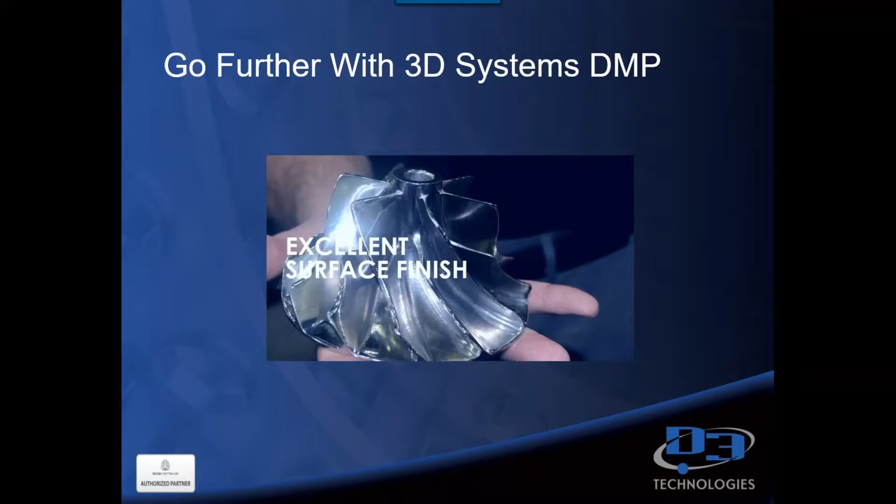So I know that gave you just a little snippet of what some of the laser metal printers look like and some of the process that it uses, and I'm going to get into a little more detail with that further in this presentation. But as you guys all know, we operate in what I call a hyper-competitive world today.

Innovation is really the true hallmark of a successful organization. Additive manufacturing has been around for 30 years, as you guys know. 3D Systems was the first to invent 3D printing with Chuck Hull, our founder, and it's obviously revolutionized to where we have today.

So as we know, it really does hold the promise of fundamentally changing the nature of our manufacturing. But only recently has printing metal parts become compelling enough, with a strong enough value proposition, for most companies to really take notice and start to take advantage of this technology.

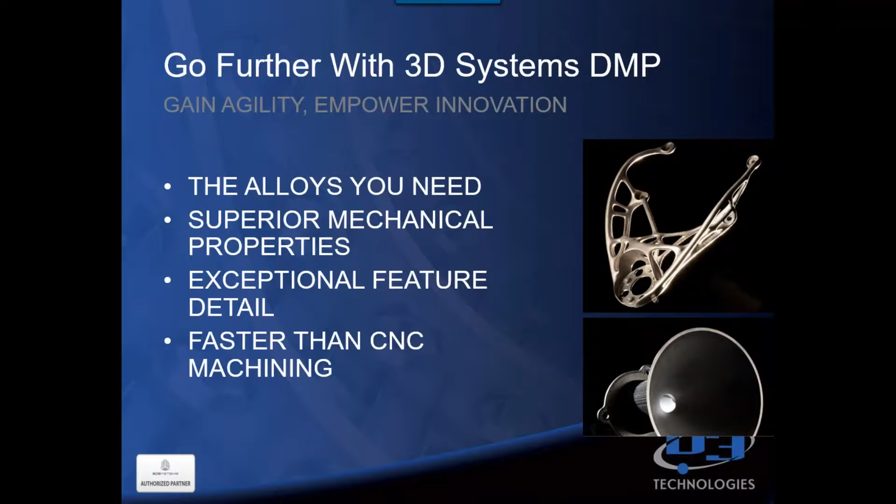So now, with 3D Systems, we can make parts from alloys that you need that have superior mechanical properties, the fine feature detail that you need, and in all honesty, not in high volumes, because CNC manufacturing is still faster for high volumes. But for low volumes, and for those ergonomically interesting products you need printed, you can do it through metal printing today faster than you can with CNC machining.

3D Systems' metal printing process builds up, as we saw in that video, a fully dense, chemically pure, complex metal part from your 3D CAD data by simply melting fine powder with a laser beam. As you saw, it's a very high-powered laser beam, applied layer by layer - it sweeps the powder over, does the laser beam, sweeps the powder over again. This really does provide you with that industrial part quality, precision, and repeatability.

Today, those printers allow you to print alloys that range from aluminum to stainless steels to titanium and other performance materials. I'm going to show you some of the different material choices later on in this presentation.

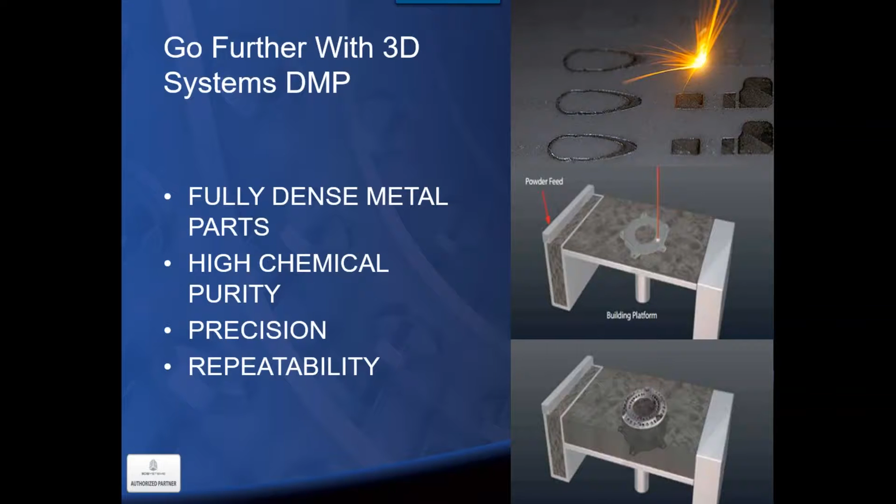With the ability to produce metal parts with the challenging geometries that I talked about, if you take a look at these pictures, you're going to see that those really just cannot be made through your traditional subtractive or even your casting technologies.

So DMP, or direct metal printing, is really ideal for aerospace, automotive, and healthcare applications, among some others out there. It allows for the production of small and extremely complex shapes so that you don't have to worry about tooling, and it really permits dramatically different part designs than your conventional processes like machining, stamping, or even die casting would allow.

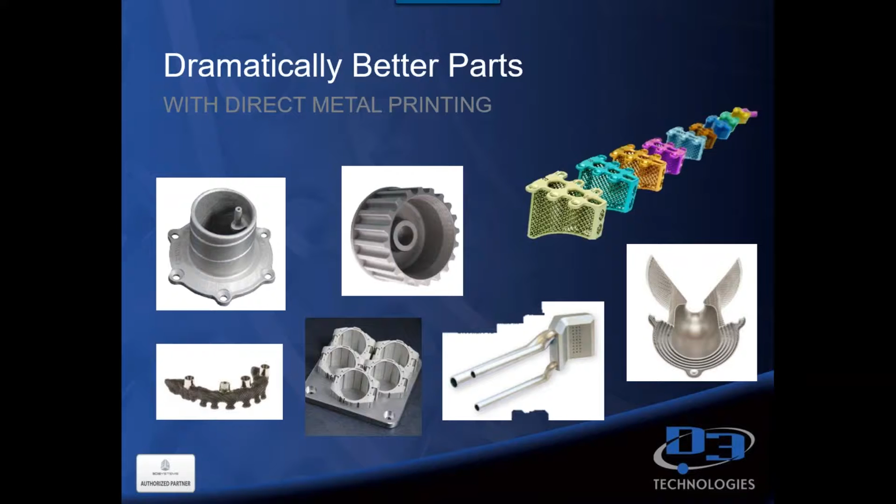As I said, we all like to say that additive manufacturing complexity is free. There's really very little cost or time associated with making parts of very high geometric complexity, which is one of the reasons 3D printing is being adopted for fabrication of all sorts of performance parts. I just want to give you an example of how companies are using 3D Systems direct metal printing today.

Number one, conformal cooling channels can be printed within objects like turbine blades and other components exposed to extreme temperatures. Those channels are not manufacturable any other way. You can't do that through traditional CNC, and it empowers new designs so they're lighter and perform better, believe it or not.

Speaking of lighter weight, DMP, or direct metal printing, is really great for shaving weight from parts. Lattice structures, topology, and thinner walls are easy to do with direct metal printing. Think about how additive manufacturing is perfectly aligned with weight reduction. Every gram of material you don't use really does save you time and money.

The opposite is true when you think about it for subtractive machining—we're talking about taking weight out, which really increases your time and cost. From a product reliability standpoint, it certainly goes up, as things previously assembled from dozens of components can now be printed in just one single piece, which saves a lot of time, reduces bill of materials, and reduces expenses.

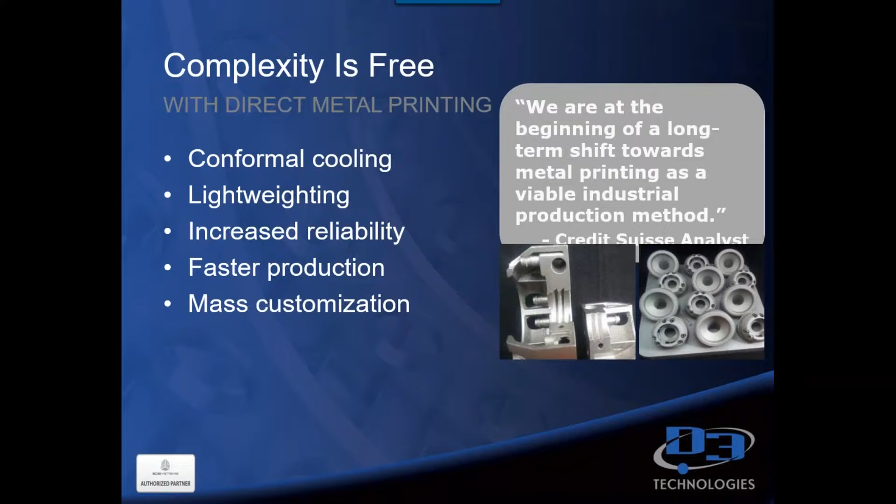So I wanted to put together a list of where these parts and uses are being made with direct metal printing today. Think about this as far as your organization goes and see if any of these might apply to you.

Many companies really are buying 3D printers for specific uses, and then over time they find that additive manufacturing is really useful in more ways than they actually anticipated once they have it in-house. So as I said, there are many different ways it's being used today.

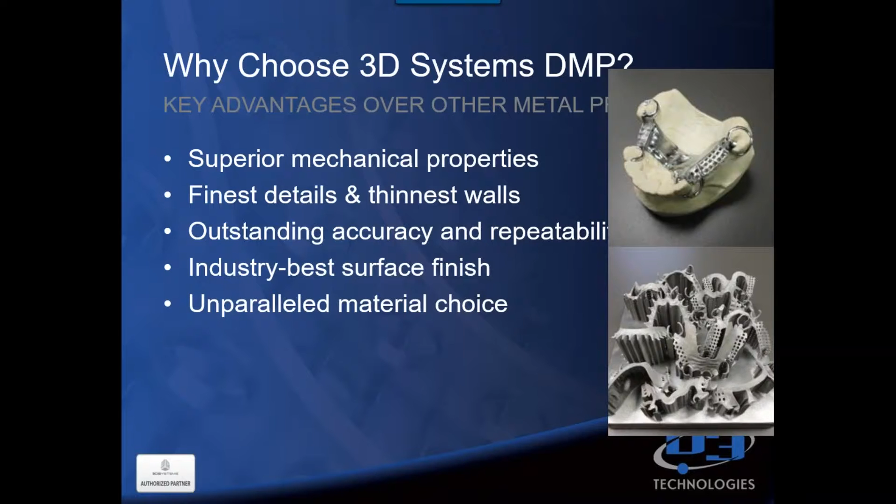There are other approaches certainly to additive manufacturing. So here are, I'd say, some good advantages for 3D Systems.

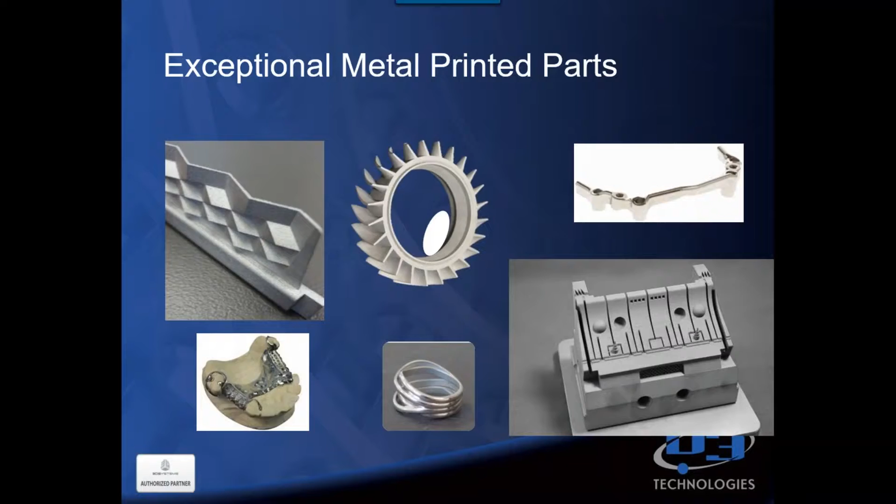3D Systems offers about 4 different machines out there, and I'm going to talk a little bit about these so you have an understanding of the differences—they all have different capabilities. The DMP 100, 200, and 300 are automated systems. They offer a hands-down great surface finish, and they come in 3 different size systems, with build plates differing depending on what size you need for your research and development.

And of course we've also got the 320 unit, which is our latest and greatest, built on an architecture focused on throughput and production flexibility. With almost 500,000 parts built, 3D Systems has refined and optimized the printer to run the most challenging alloys in a 24/7 production environment.

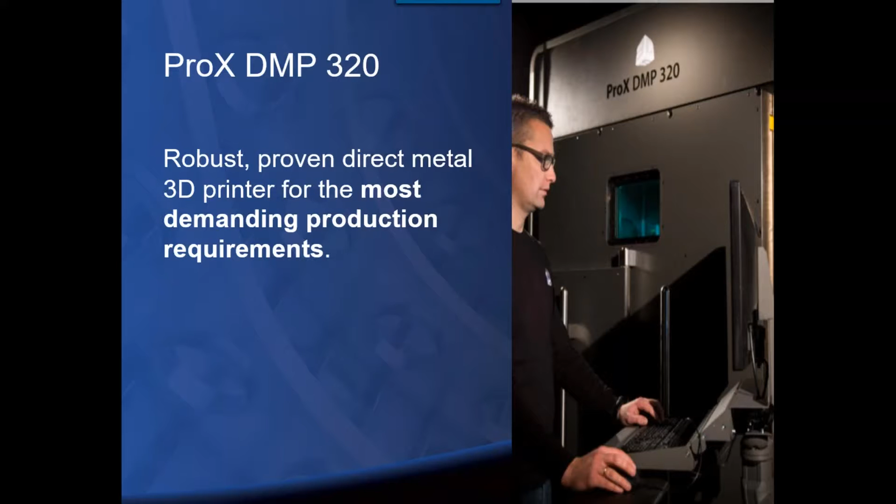So let me show you a little bit about the ProX 320, this heavy-duty metal printer, and what you can get from it. Obviously, with the 320, you can ramp up your additive manufacturing and print parts with some of the highest performance alloys, such as titanium, stainless steel, or Inconel 718.

So with the 320, as I mentioned, it's been proven with over hundreds of thousands of prints. This is designed to run 24/7. It has the largest build volume, with a 275 by 275 by 420 mm build volume, so this is really a large build volume.

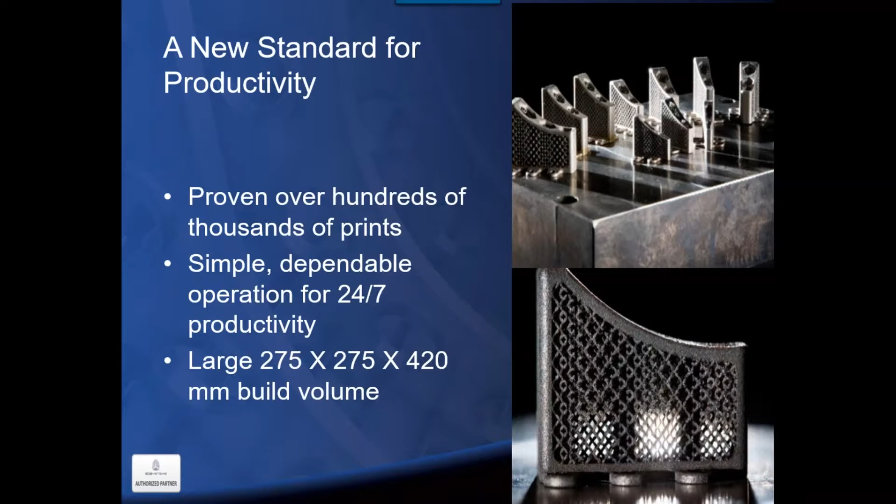This is a good example of a quick swap build module. It enables super fast turnaround between material changeovers and fast powder recycling. As soon as one build is complete, you can remove the entire build module, roll in a new one, and start your next build. While you're depowdering parts outside the printer, as you saw in that video, it's easy to remove, as you can see in the lower left image. The included rolling stand lets you move build modules around your shop floor easily, meaning virtually no downtime between prints, so you can keep pace with demanding production cycles.

In addition, the sealed chamber during builds helps keep oxygen contamination to a minimum, and that's very important when building metal parts.

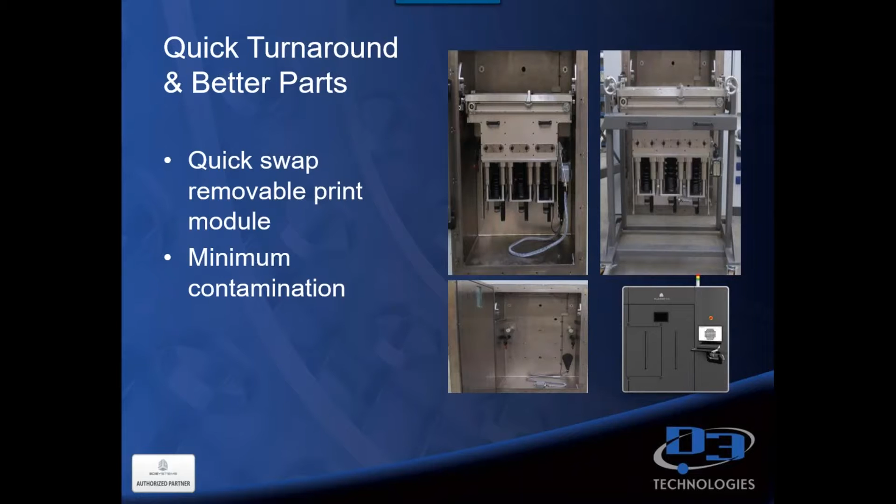Every part that comes off the DMP, the Direct Metal Print 320, is exceptionally chemically pure because of the build chamber's low oxygen content of only 25 parts per million. That is really incredible. Such a low oxygen environment enables the 320 to build oxygen-reactive alloys that are really challenging to run in other printers, meaning these parts are strong and corrosion resistant as a result.

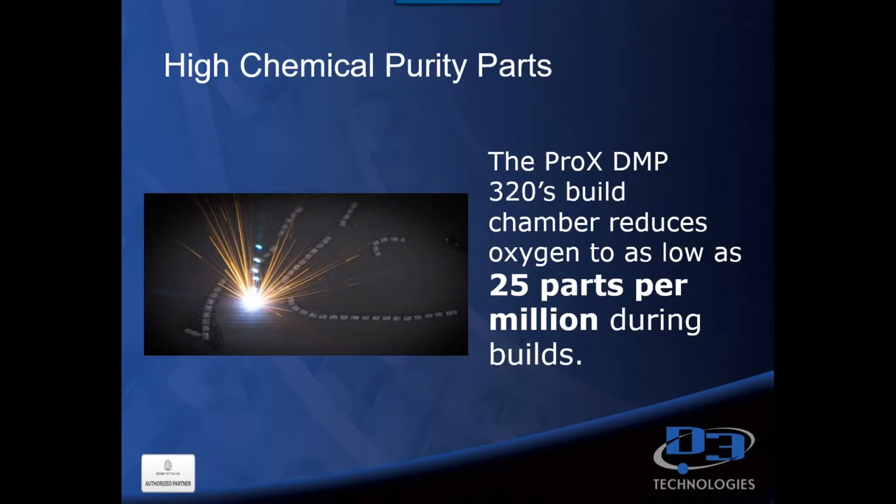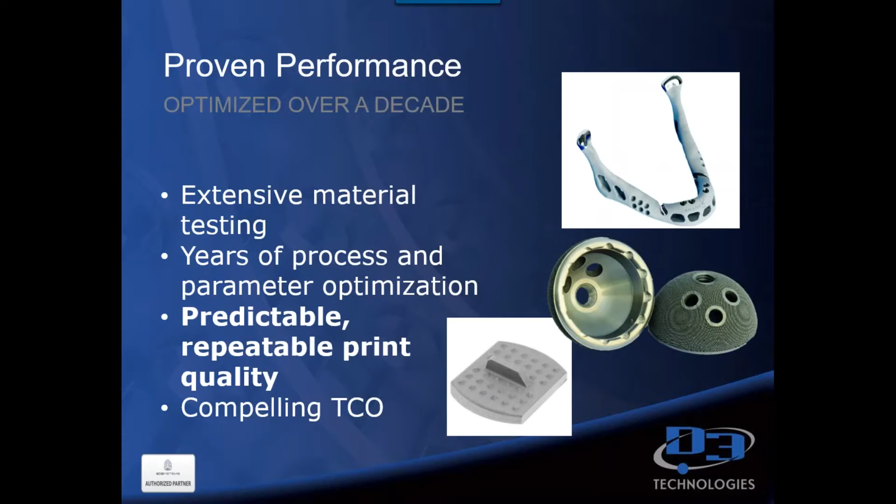The 320 features build parameters developed from an outcome of nearly 500,000 builds, giving you predictability and repeatability for virtually any type of geometry. As I said before, complexity is really free. We just came out with this printer at the beginning of 2016, yet it's still got that decade of heavy use and optimization through running it in a Service Bureau environment.

So these are the materials. The 320 is available in two configurations: one optimized for titanium, and one optimized for stainless steel and Inconel. These configurations can be changed at any point with a 3D Systems service technician through a simple service visit. So those are the three materials, also the most challenging materials, that can be run in the 320.

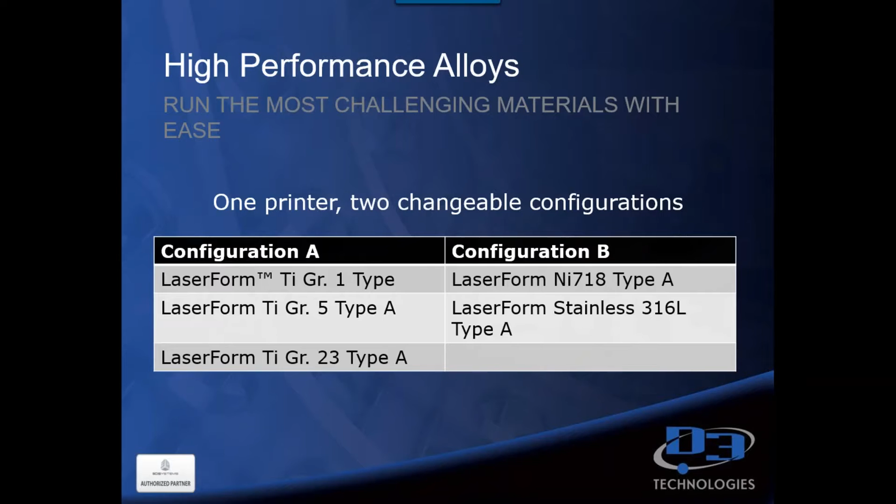The 320 is heavy duty. It's a great standard for productivity in metal printing, designed for high precision, and produces chemically pure titanium, stainless steel, and Inconel parts.

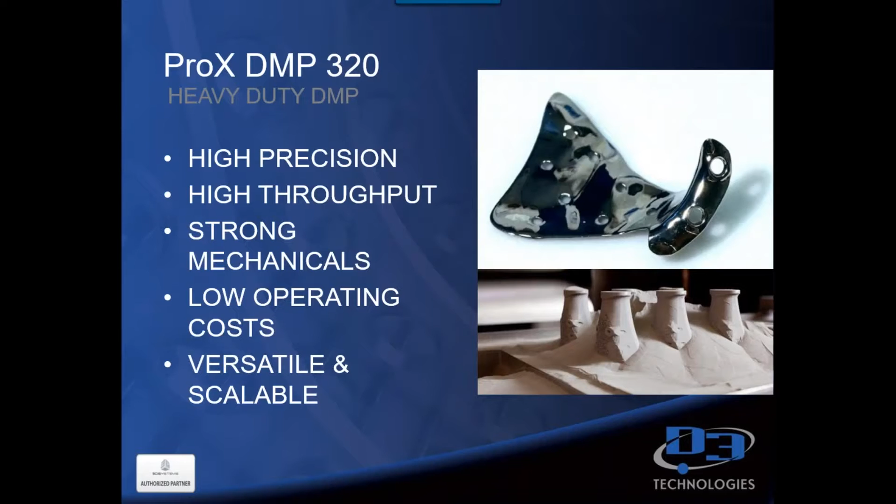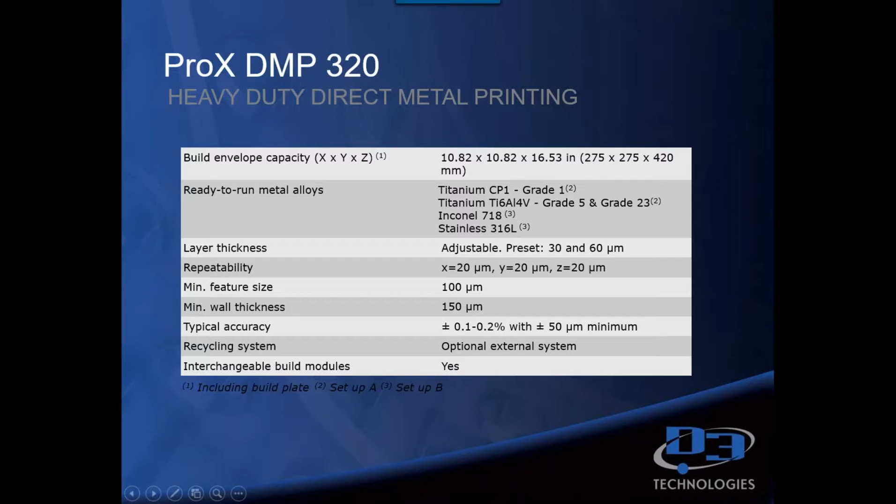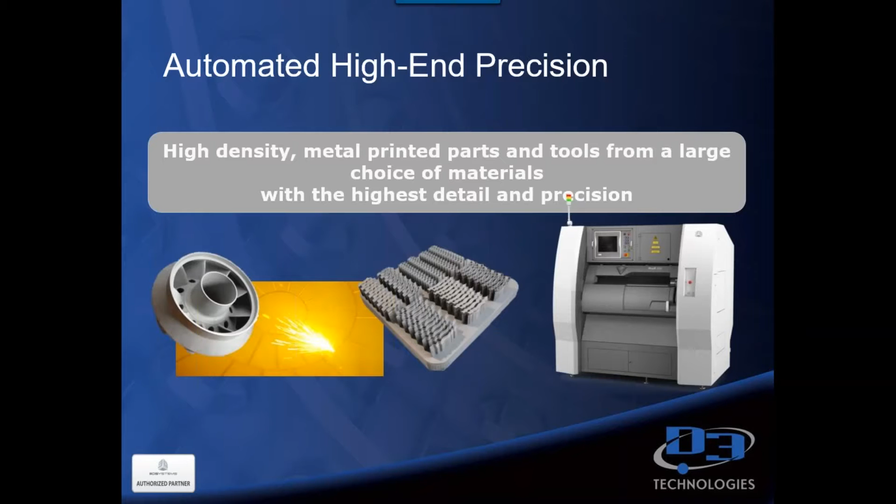Let's go on, and I want to show you a little bit about the ProX 100, 200, and 300, because those are different systems. Again, those are designed for highly functional parts that you can print out in a matter of hours. The time-saving benefit from all three of these is certainly much more, in some cases, than over CNC machining and investment casting, which can be difficult as well. With the ProX 100, 200, 300, it really does allow you to get exceptional detail, and that is automated as well.

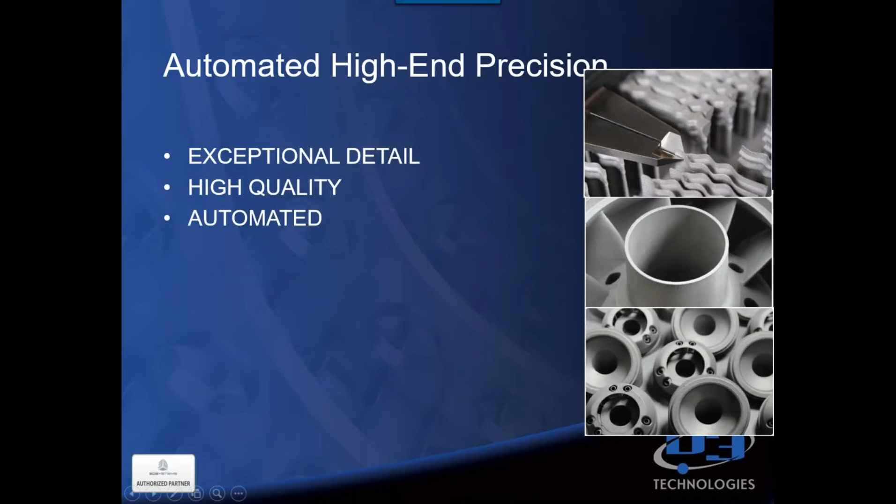You can run cobalt chrome and 17-4 in the 100, and the 200 and 300 add the ability to run maraging steel and aluminum in addition, so the 200, 300 allow you to run a few more materials than the 100 does. The 100 also has a smaller build chamber, about almost 4 by 4 by 4, versus the 200 and 300, which have a bit bigger build chamber, and I'll show you that here in a moment.

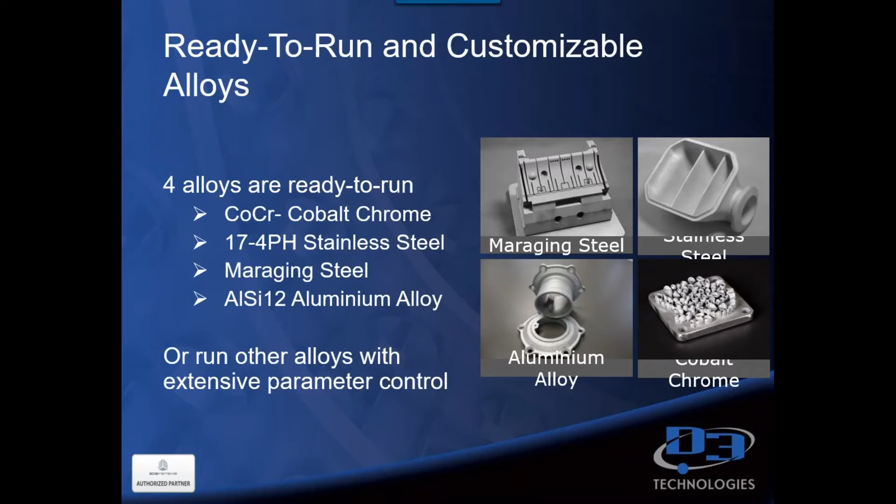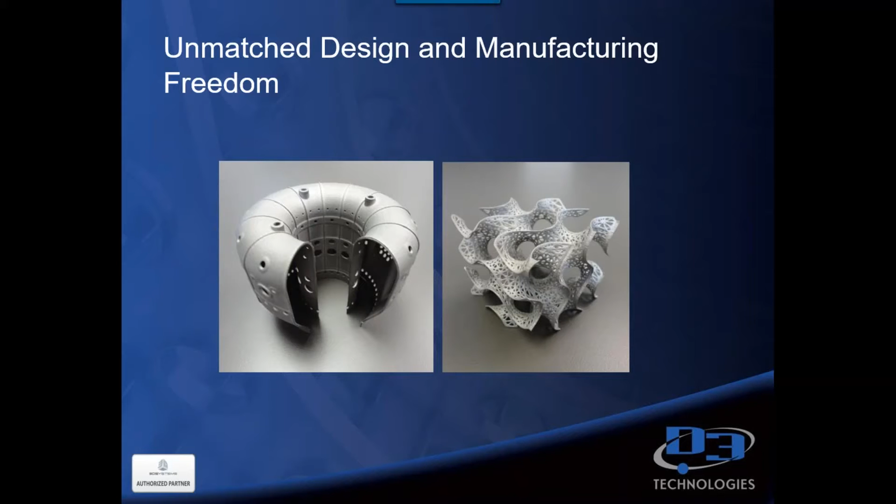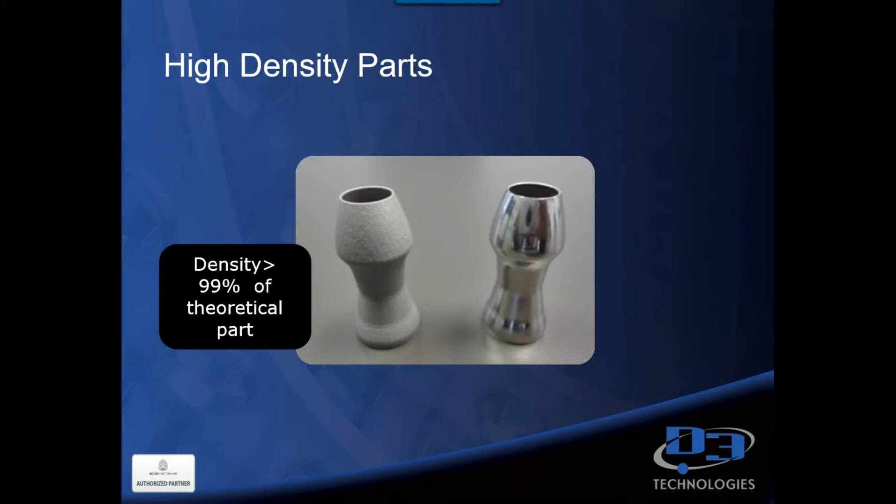With the DMP 100, 200, 300, parts are high density, greater than 99%, thanks to our patented roller layer system. During the print process, it lays down a line of powder, and then the roller comes back and rolls over it, compacting each layer as it distributes the powder, forcing particles closer together and enabling higher density. That's something no other manufacturer has, and it's a big advantage in metal printing, giving these high density parts. So you get better, high quality castings with uniform properties throughout the whole build volume.

With the 3 printers, they work with the lowest particle sizes and layer sizes of 5 to 30 microns in metal 3D printing, leading you to the ability to get excellent material quality. You're going to get a surface finish of about 5 to 6 RAs, which is really great when it comes to metal printing. In addition, there's limited mechanical stress involved, and honestly these parts you can do anything with once you get them off. They are true end-use parts, just as durable as those produced on CNC machines.

With the increased definition of details, you get a feature resolution of about 150 microns. When you get ready to remove the parts off the build plate, it's actually easy removal with minimal scarring of the part surface. Typically you just take a wire EDM and pull those parts off, and at that point you can do whatever you want with it, whether that's sanding or other finishing.

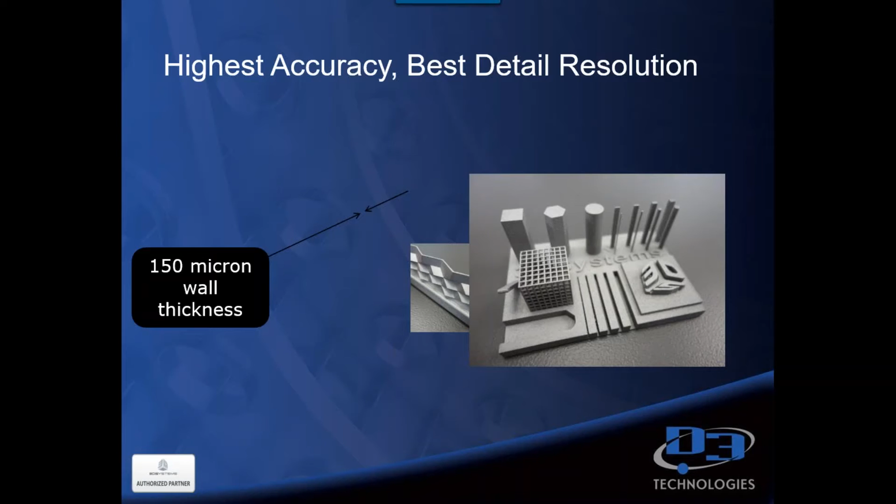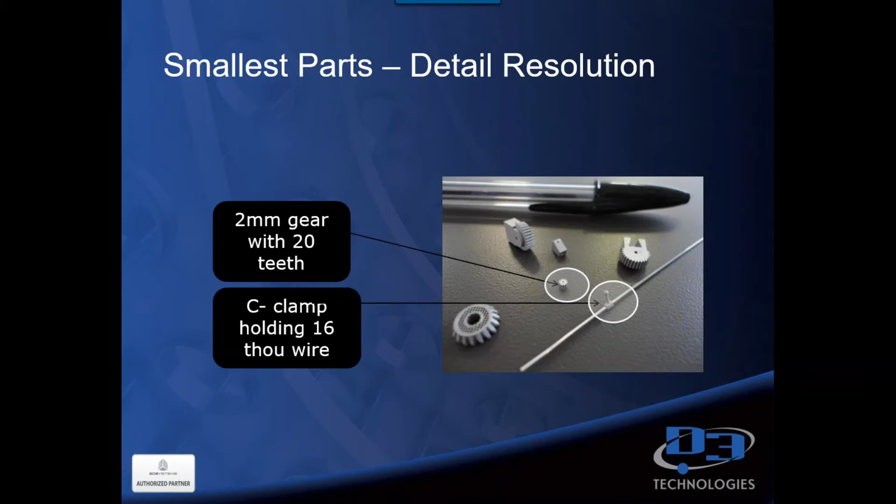I just want to show you the smallest part detail resolution you can get off of this. This level of detail resolution is really unique among these parts. The small intricate parts really can't be built by any competitive DMP. Take a look at this gear with 20 teeth, look at how small that is and the level of detail you can get. The C-clamp holds about 16 thou wire, so again, very small details.

Tolerances are more important when you're building one-off parts, which you're typically going to be doing with metal. But when it comes to manufacturing, repeatability is really key. Customers are used to that excellence of repeatability in CNC machining, and with the 3D Systems direct metal print process, it's consistent and repeatable, both to produce prototypes and for direct manufactured metal parts. From a repeatability standpoint, the ProX direct metal printers offer that repeat result, because 3D Systems manufactures its own process-optimized scan heads, precise mechanics, motors, precision optics, and mirrors. Other printers can't control those parameters as well as we can, due to the patented roller system I talked about.

As for tolerances, the first-time build tolerances are about 50 to 100 microns on most dimensions, and then better tolerances are achieved for repeat builds that can actually be fine-tuned.

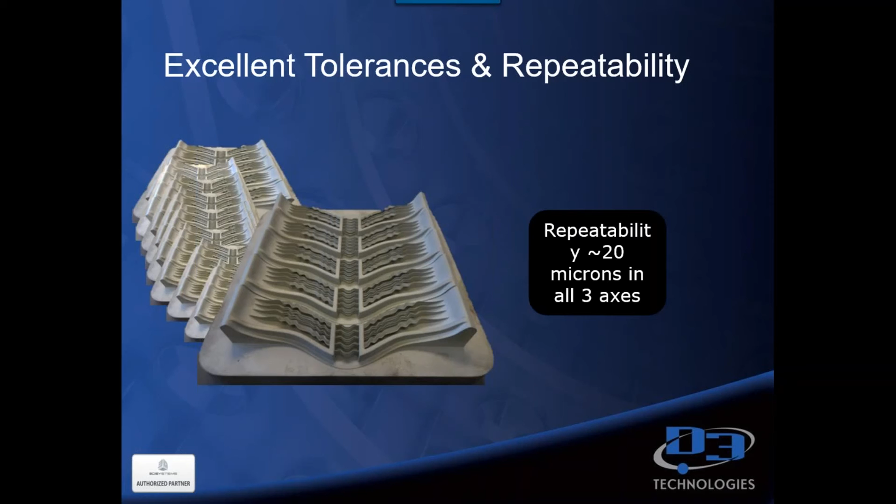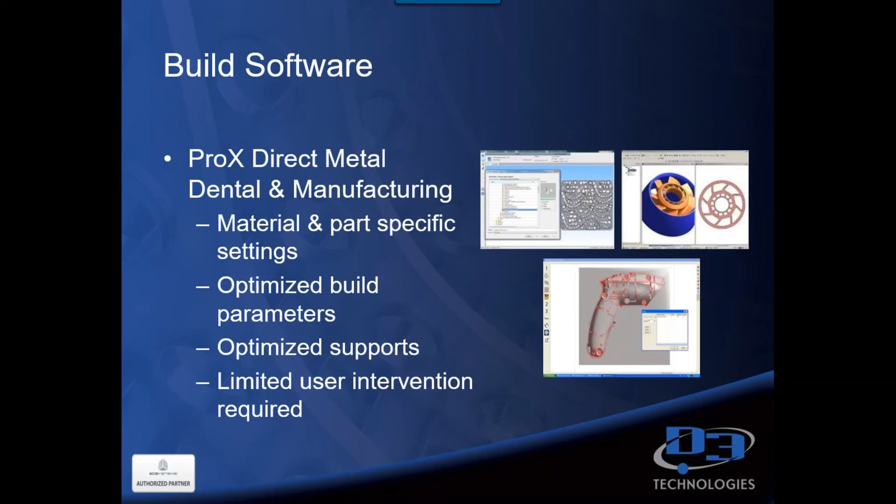This really allows you to reduce your time in manufacturing and gain some flexibility, benefiting from a large choice of materials. Up to 15 different materials are available in this 3D printing technology for metals, giving you a lot of variance for different types of metal solutions.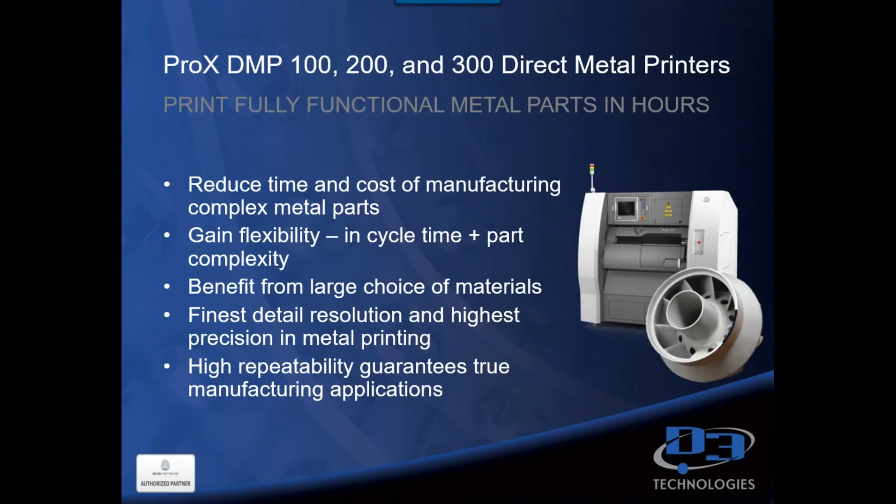I'm happy to go through or provide any detail on any one of these units if you guys have any questions at all. I'm hoping this has been beneficial for you—I just wanted to give you enough information to show what 3D metal printing can do today. So please don't hesitate to reach out to me if you have any questions.